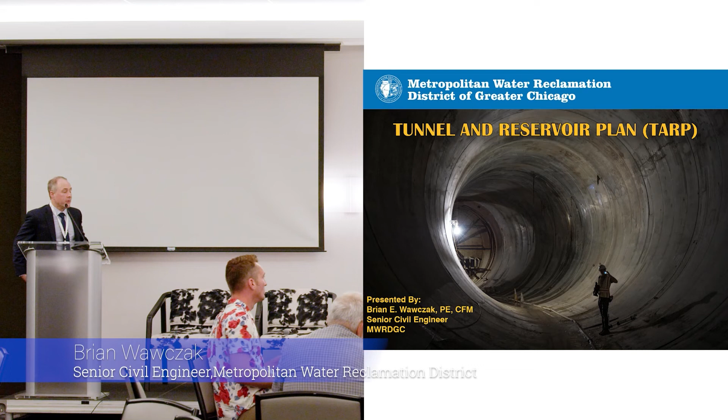I am Brian Wawczak from the Metropolitan Water Reclamation District of Greater Chicago, also known as MWRD or MWRD-GC. It is a mouthful. We generally just say the district back at the office, and I'll probably revert back to that just out of habit during the presentation, so forgive me ahead of time.

But it's always an honor to talk about one of our many excellent and diverse projects, and the Tunnel and Reservoir Plan is no exception, also known as TARP, or Deep Tunnel, some people call it. It is one of the exceptional and excellent projects of the 20th century, and now moving into the 21st century. It's a project that's been emulated not only in the United States in different cities, but actually all over the world, in London, in Singapore, in Japan. It is our region's solution to flooding prevention and pollution control. And it seems to be working wonderfully so far.

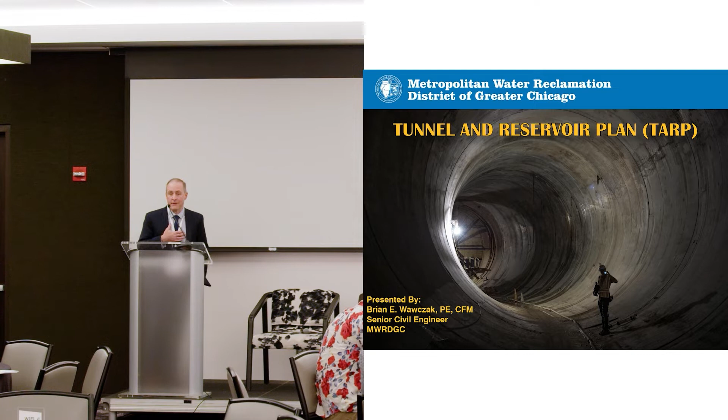I can say that it's very appropriate and special to talk about it this year because it's the 50th anniversary of TARP. It was originally adopted by our Board of Commissioners in 1972, same year as the Clean Water Act was enacted. So certainly a very monumental year in the water environment sector. So what is TARP? It's a system of very deep tunnels and vast reservoirs that collect our combined sewer overflows, what we call CSOs, before they can make their way to the waterways and pollute our water and Lake Michigan.

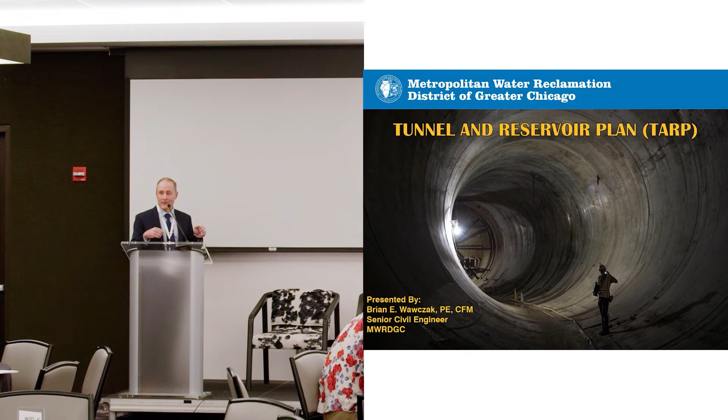So before I dive into TARP, and I say that figuratively, of course, I don't want to literally dive into TARP, but I thought it would be good to talk a little bit about the mission of the district and how TARP complements that or supplements that. So the district, or MWRD, was formed in 1889. Our initial major project was the reversal of the Chicago River, which is an entirely different presentation. I could probably talk 60 minutes about that, but we'll save that maybe for next year if Ken invites us back. But our main mission now is to manage and treat wastewater.

We do that for the city of Chicago and 128 different suburban municipalities. Our service area generally covers Cook County minus a couple of different pockets. It's 883 square miles in size. We serve 5.25 million people. And then when you include commercial and industrial flows, the population equivalent actually jumps up to 12.75 million. So we're serving quite a big core populace.

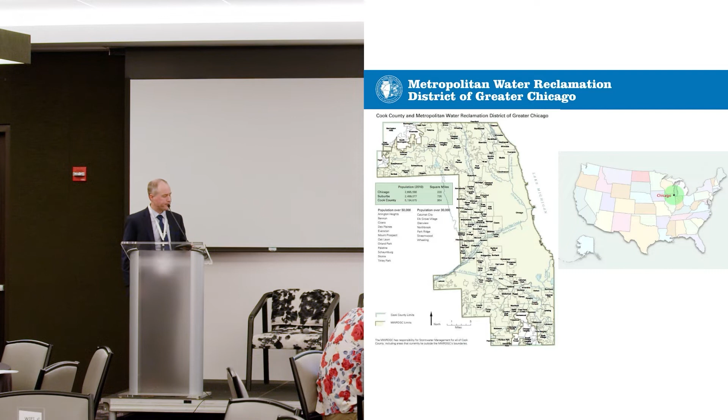And we actually don't call them treatment plants anymore. They're reclamation plants because one of our other core mission points is to reclaim resources. We reclaim phosphorus and other nutrients, algae, biogas, which can be converted to electricity, and that helps us towards our energy neutrality goals, biosolids, which can be processed and become fertilizer for commercial and residential applications. So we're doing a lot at the plants.

One of our other core missions is to manage stormwater. We've been doing that since 2004. So TARP supplements that because we can accept overbank floodwaters and store those so that floodwater is not making its way to our basements, into our homes. We also are custodians of the local waterways. We protect the local waterways in terms of water quality, making sure that it meets NPDES standards. TARP helps with that by capturing these CSOs, these combined sewer overflows, so that pollutant sewage can't make its way to the waterways.

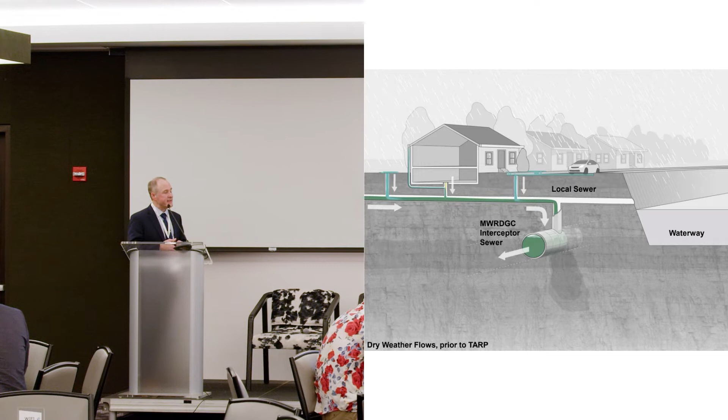So in 1972, the district came up with this plan called TARP, and it was broken into 2 phases. Phase 1 would be the construction of very large tunnels, very deep. Those tunnels would essentially capture diverted flow from the local sewer systems prior to outletting to the area waterways. And we would store that flow in the TARP tunnels until the storm passed. Once there was capacity at the treatment plants, we would pump it up and then treat it and process it before outletting to our local riverways.

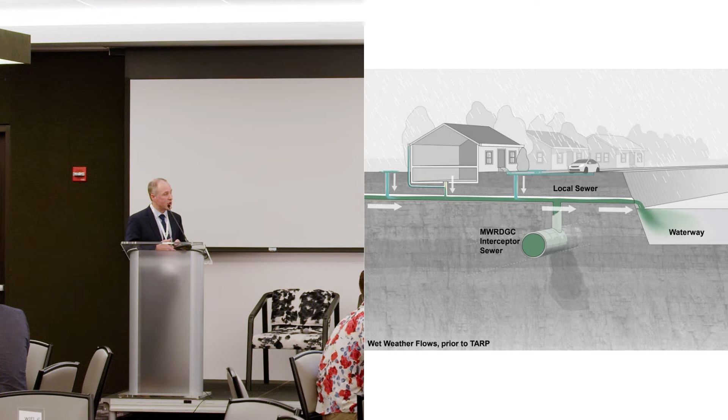Just a quick timeline of what's been done, and it really starts before 1972. The district and the Army Corps of Engineers had a lot of conversations, and there were various plans that were discussed, different TARP systems. But the final plan that was agreed upon was adopted by our board in 1972. Took a few years to get the design plans going. So construction began in 1975. The first tunnels went online in 1985. Tunnel construction was essentially completed in 2006, minus a couple of connecting tunnels on the smaller end.

And then just going backwards, our first reservoir came online in 1998. That was the Majewski Reservoir. 2015, our largest reservoir, the Thornton Composite Reservoir, came online. That was Thanksgiving weekend 2015. And then the final piece of the TARP puzzle, the McCook Reservoir, stage 1 came online at the end of 2017. And then stage 2 will be completed, if all goes well, in 2029.

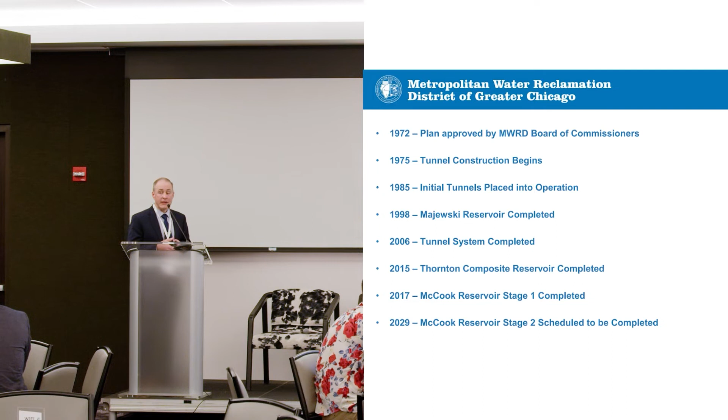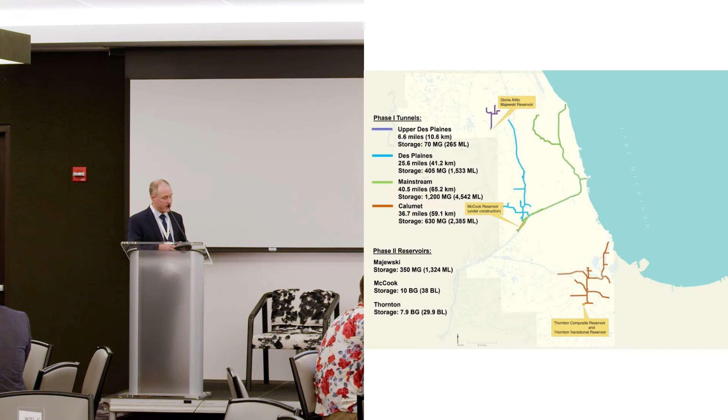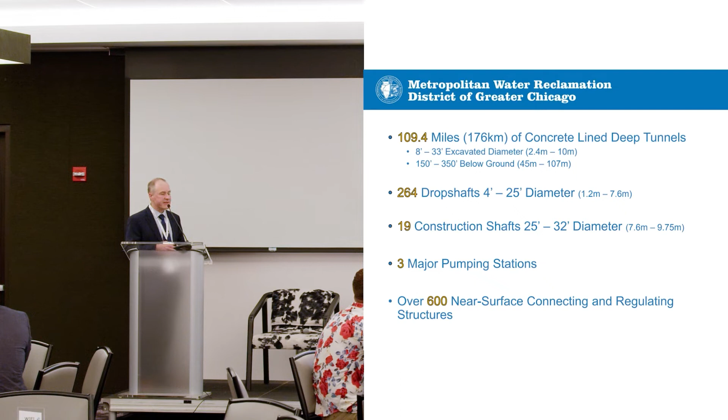What's been built to date? So far we have just over 109 miles of deep underground tunnel. Most of it is 30 to 33 feet in diameter. 264 drop shafts, up to 25 feet in diameter. 19 construction shafts, 3 major pumping stations which take that flow and pump it up to our treatment plants for processing from the TARP tunnels and the reservoirs. And then over 600 surface connecting or regulating structures.

So how does it work? This is a plan view and then below a section view. So as our local sewers fill up in heavy rainfall events, that water can't be processed at the plants, so it starts to back up towards those old outfall locations along the riverways. But before it can get there, we have what we call connecting structures, which sort of intercept the sewers, and the CSO waters will drop into the connecting structures.

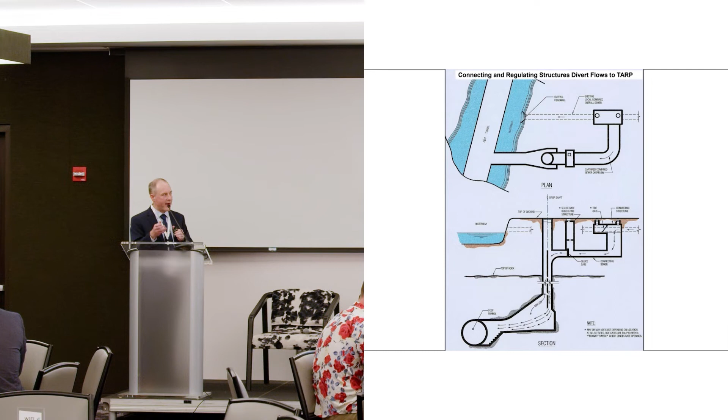They're diverted to a regulating structure, which has a sluice gate, which is either operated manually or automatically. And then from the sluice gate, the CSO water drops down a drop shaft, I guess it's aptly named, right? A drop shaft, then into our TARP tunnel. So interesting note, the drop shafts actually have 2 different chambers. One chamber to accept those incoming CSO flows. The other chamber allows for the displaced air from the tunnel system to rise back up to the surface to escape through an open grate.

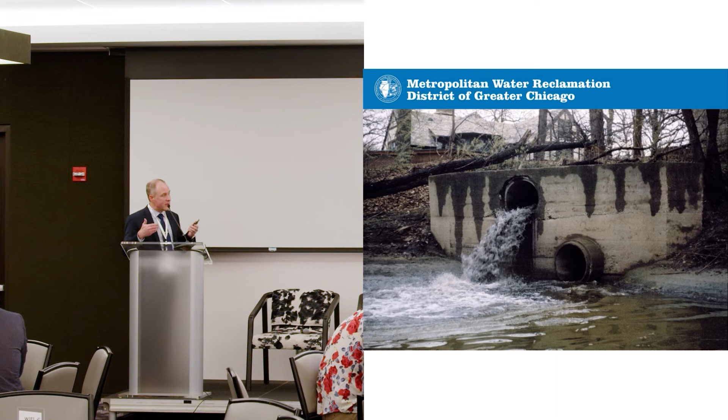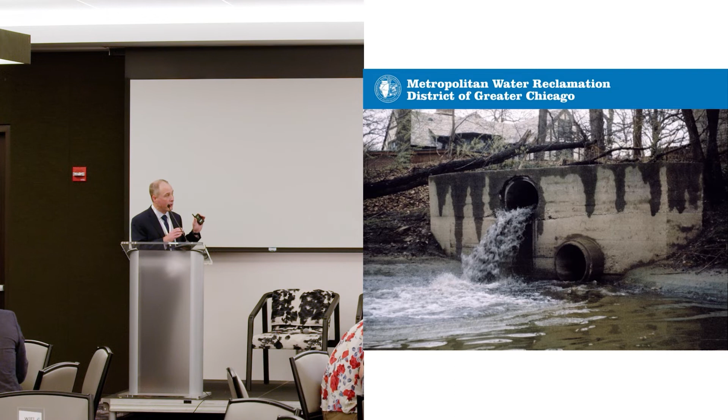And this is what we're trying to prevent. It's an old photo. This is a CSO in action. This was along the Des Plaines River, I believe, in the late 1990s. Well, we don't see many of these anymore. These have been virtually eliminated in the Calumet service area. They have been eliminated in the upper Des Plaines area. We do see some still happening in our mainstream area, in the tunnel areas that are tributary to McCook. We're anticipating with McCook Phase 2 coming online later this decade that we will drastically reduce these CSOs that are happening along the Chicago River and the Des Plaines River.

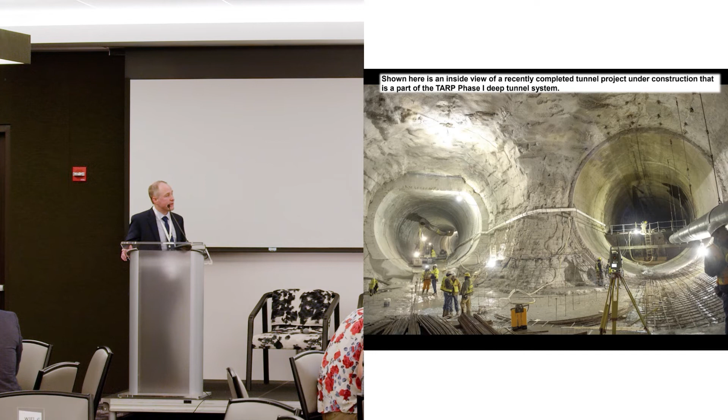Here's a photo of the construction of the tunnels sort of in action. This is a location just north of the McCook Reservoir where 2 tunnels connect. We have very large boring machines that go through the bedrock. And before we place the tunnels in operation, we line them with a 12 to 18 inch thick reinforced high strength type RA concrete tunnel liner.

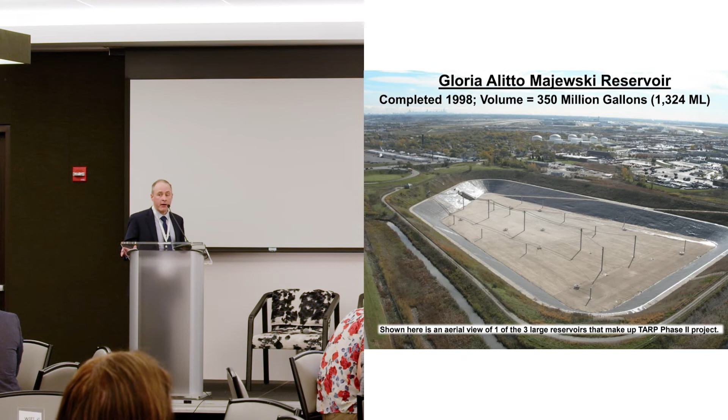Majewski Reservoir. This is the reservoir just outside of O'Hare Airport. I think in this photo, in fact, you can see O'Hare, and then in the very faint background, the Chicago skyline. This is the smallest of our reservoirs. It only holds 350 million gallons of water and sewage. Again, this came online in 1998. It's named after one of our commissioners from the 1980s and 1990s.

If you were to fill it up with 55-gallon rain barrels from top to bottom, north to south, east to west, and then take those rain barrels out and line them up end to end, the rain barrels would circle the earth 3.5 times. So I triple checked that calculation, just double check me on that, but it's amazing. So it was mined out by Hanson Material Service. It's the north lobe of the Hanson Material Service quarry, which the district now owns.

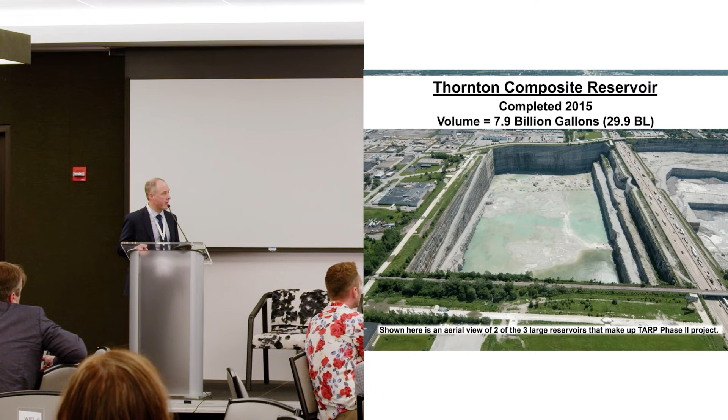We created a grout curtain around the perimeter to make sure that the aquifer around the reservoir was protected, and also to keep the CSO water inside the reservoir, and that seems to be working tremendously as well. We have groundwater monitoring wells around the reservoir that we check on a quarterly basis. So everything's working great, knock on glass, but very proud of this project.

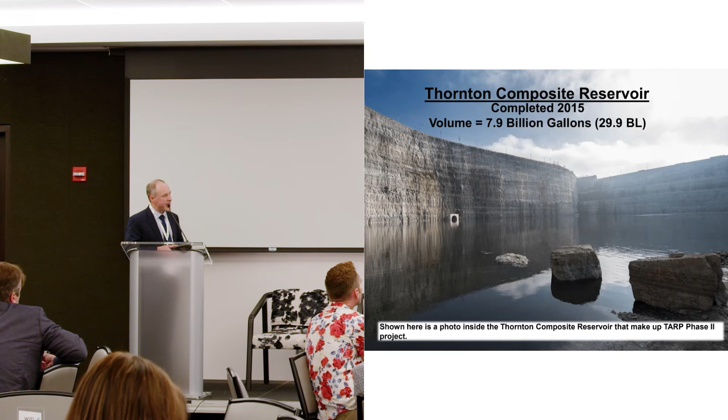Another photo from inside the reservoir. This is at the water surface. We maintain a 20-foot maintenance pool in the reservoir. And on top of that maintenance pool, we have 20 SolarBee aerating units that create a 5-foot deep oxidized layer beneath the surface to keep any odors sort of below that surface so they don't permeate up into the atmosphere. In the background, you can see the 30-foot diameter TARP connecting tunnel that goes to the Calumet system.

And finally, the McCook Reservoir. So stage 1 went online in 2017. That holds 3.5 billion gallons of water. Stage 2, the last component, as I mentioned, will be coming online in 2029. That'll bump us up to a total of 10 billion gallons, so adding another 6.5 billion gallons.

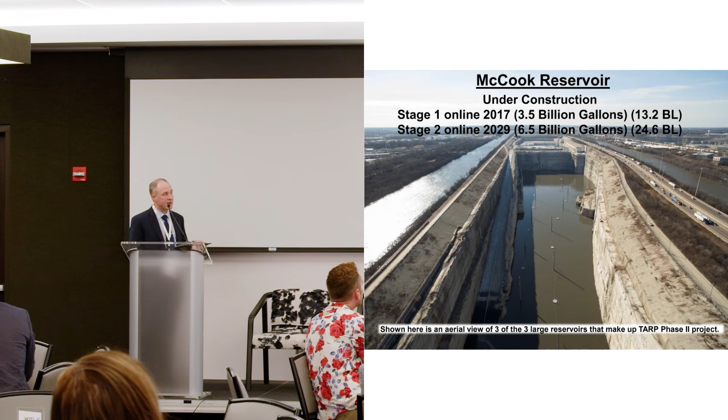So this photo is looking southeast, if my bearing is correct here. I believe that's the I&M Canal on the left, the Stevenson Expressway on the right, and then the Des Plaines River just right of that. McCook Reservoir, I should mention, was mined out by Vulcan Material Service, similar to Hanson Material Service, HMS, in the Thornton area.

So, of course, any great project has challenges. So I thought we would talk about 2 or 3 of those right now to be transparent and talk about some of our solutions. One challenge is odors. We're talking about sewage and solids, which can collect at the bottom of the tunnels over time, especially if there's a big difference between rainfall intervals. And with solids, you have hydrogen sulfide buildup, H2S buildup, and then when there is a storm and there's sort of a flush, that H2S gas gets pushed up towards the surface and, in some cases, I should say, escapes through a drop shaft.

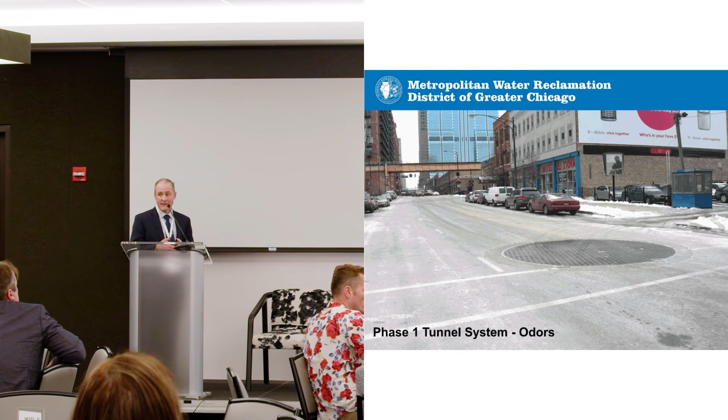We're looking at a photo here of a drop shaft on Canal Street in downtown Chicago. Most of our shafts are located in forest preserve areas, industrial areas, away from our business districts and residential areas. But there's a possibility that odors can come up. So what have we done to overcome this challenge? When this happens, and it doesn't happen at every drop shaft, we have a louver system we can install. We have shaft covers. We've actually been working on a proprietary odor control vapor misting system in one location that seems to be working wonderfully. It doesn't just mask the odors, but it actually neutralizes the odors.

Another issue, transient flows. And I have to admit, this is a little bit even above my understanding. We have hydraulic modelers at the district that look at this all the time. But because of the variability in rainfall events, and our service area and the TARP system being so vast in size, the downstream end of a tunnel can fill very quickly. The upstream end can be filling very quickly at the same time. And air is trapped in between, and the air has nowhere to go.

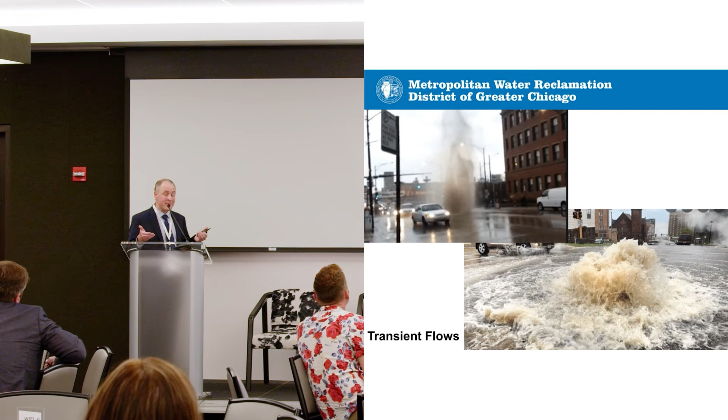It tries to escape as the downstream flows are pushed into the tunnel towards the downstream end. The air is trying to bubble out, taking the path of least resistance. So we can see some bubbling, and sometimes we can see even geysers of some sort. So these 2 examples are photos from the Chicago area. The most famous example, if you go to YouTube and type in Minneapolis 1999, there was a very large geyser that happened on a highway. It blew off a shaft cover that was like 20 feet in diameter, and luckily nobody was killed, but certainly a very dangerous situation.

So how do we remedy this? We can implement air relief valves, trade out manhole covers for grates, and try to allow some sort of air relief happening in the modeled areas where we see this happening on more than one occasion.

And finally, maybe most importantly, just talking as an overview on TARP, we're very happy with the TARP system. It has taken quite a bit of time to implement, 50 years to this point. Its cost in today's dollars, taking into account inflation, is $3.8 billion to build. So we realize moving forward, gray infrastructure, tunnels and reservoirs, are not necessarily always going to be the answer. So we're trying to come up with ways to supplement those. And one idea is green infrastructure. It allows us to look at flooding on a very hyper-local or hyper-regional level.

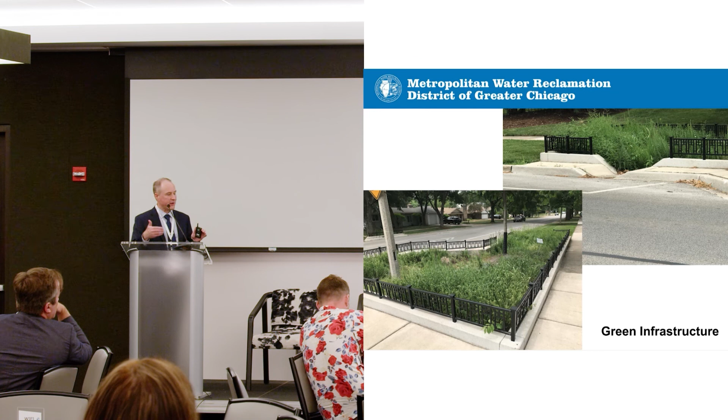So green infrastructure is an idea, and I'm going to show you very quickly two examples. One is the idea of curb bump outs, where we have an engineered soil stratum where water can be directed from the street through a curb notch into this soil stratum with native vegetative plantings, and it will gradually seep into the ground, either further down or into an underdrain where it then can be directed back into the local sewer. But timing-wise, we'll give the local sewers a chance to empty out, and then this water can come in when there's capacity.

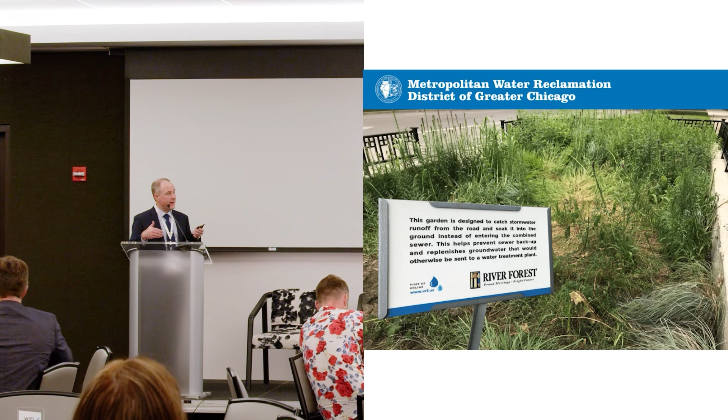And there's lots of benefits to this. Aesthetically, if it's maintained, it looks great. There's an educational value. There's a safety value with traffic calming, a smaller pedestrian walkway to cross a street. So this is one idea, again, on a very hyper-local level.

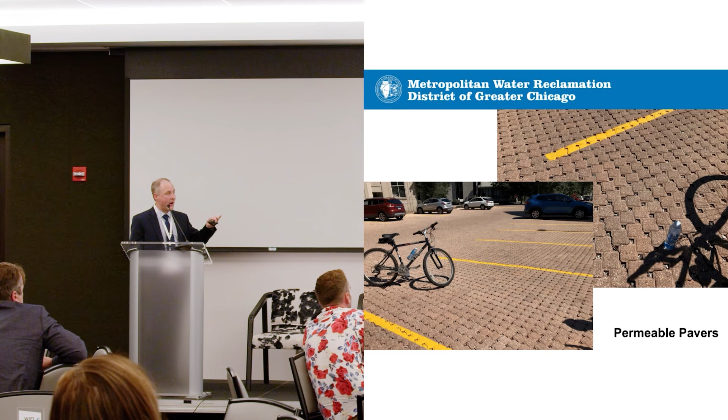Another idea is permeable pavers, and these require maintenance as well, but you have these openings in a paver system in a parking lot or in a street. It allows water to drain down into a stone stratum where the water can be held, and then eventually drain down lower into the soil or into an underdrain and then back into the local sewer system. But again, it's a delay on getting that water into the local sewers immediately. So something to consider in the future.

So we're very happy with TARP. It's an amazing project. We've seen so many benefits so far. As I mentioned, the CSOs in the Calumet and the Upper Des Plaines area have been eliminated. With McCook Phase 1 coming online, our CSOs captured went up from 28% to 70%, and we're hoping with Phase 2 that it goes up even higher. The water quality has improved in our Chicago area waterways, what we call the CAWS, another one of those government acronyms. Dissolved oxygen levels are much higher. The bad stuff is much lower: suspended solids, ammonium, nitrate, cyanides.